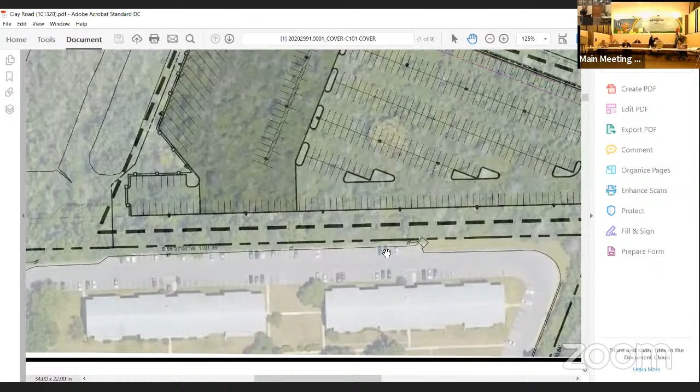If I flip back to the landscape plan here, we are adding in not only a berm, about 3 feet tall, but a plethora of deciduous and evergreen trees as well.

Has that already been approved by CNP? Yes, we had an in-house landscape architect design that and sign off on it, and I believe we had a few comments from Stantec, the town's landscape engineer, which we've addressed and replied to. Are those planned to be planted this year? If all goes right, yes.

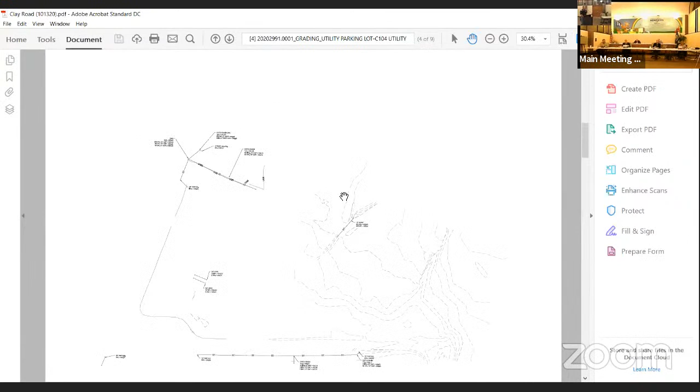The only other question, I don't know if this was already answered - this is still an active construction site. This is the T-Mobile site that started under construction, still active, being split up into different projects. We have, in a sense, two projects going on this one site, the other lot, plus remaining land - what's planned for that parcel?

At this time, there is nothing planned for that parcel. It's been cleared, rough-graded, and seeded. It's been restored. That was a point of contention, it has to be back to stabilization before we can keep moving forward. And the rest of that whole southern parcel of lot 2 is all parking lot, correct? Yeah, correct, this will all be parking lot as recently approved by the town administratively, like Mr. Martin said.

These remaining lands will remain topsoil and seeded at this point for future development. This stormwater management facility has been constructed and is either in process or has been stabilized with seeding. Yeah, it's been pretty stabilized. It needs a little touch up, I think, but otherwise it's been active for pretty close to a year.

The T-Mobile site grading had a swale on the south side of lot 2 from the east to the western pond. Is that in conflict with this new berm? No, we've actually designed a swale there to not only complement, but kind of carry that thought process from the former design plans forward to this.

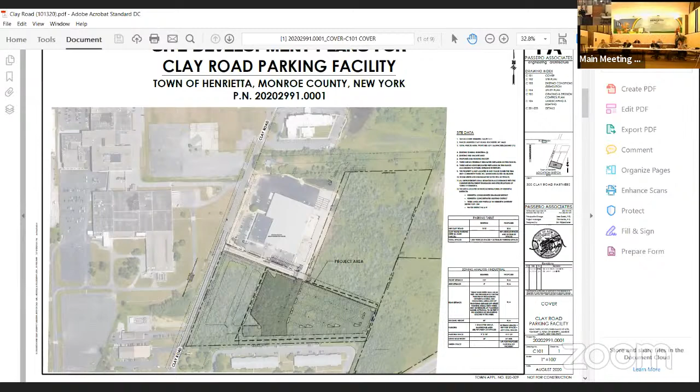Okay, you're working the SWPPP with Joe, right? Yes, correct. Is the swale on the north side of the new berm? If I recall correctly, we can just flip to the drawings. The beauty of doing this virtually, it's on the north side of the berm. So it captures - you can see the parking lot's graded from northeast to southwest.

There's a green infrastructure practice here, and then the remaining parking lot is captured through the swale and then into the stormwater management facility that was previously constructed. Okay, so that's what I was just checking on too.

This lot, the T-Mobile site, I don't have those drawings in front of me, but this was meant to be a parking lot still with a T-Mobile site. I don't know where the building was supposed to go. A portion of it, yes, was supposed to be the road. There was a swale there and then they had the access road coming up through there.

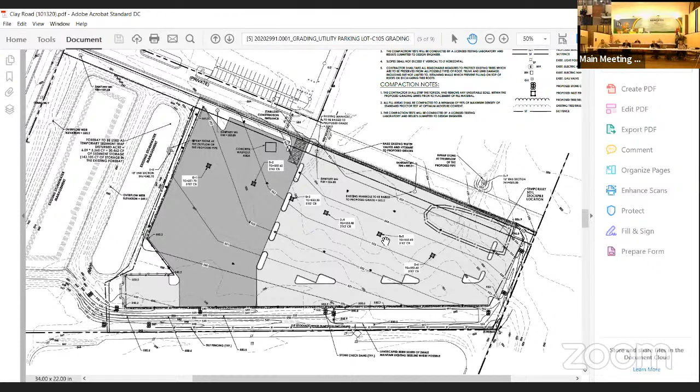Was that building to the east side of this lot? Yes, it was on the second parcel, shown as parcel 2 on your map. So that was supposed to be the building, and this was supposed to be the parking lot for the T-Mobile.

I don't think so, Craig. I think it split the line there. There may have been part of it on there, but most of it was going to be a separate lot that was going to be developed at a later date. Okay.

Well, that was kind of my question - I wasn't sure how far we were really augmenting plans that were originally approved and were already half constructed. No, that shouldn't be an issue.

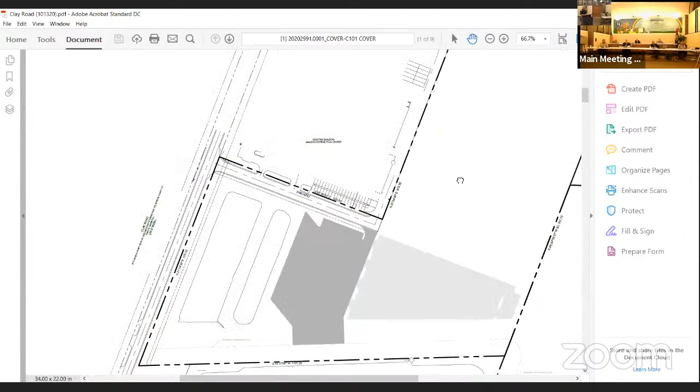No, actually, you hit the nail right on the head, and I don't mean to cut Marty off. So Marty, if you want to answer, just tell me to be quiet. But Mr. Neal, I'm going to zoom back here. I don't have the subdivision map in front of me, I apologize, but this will suffice. This is part of Lot 1.

And then these 330 Clay Road and this parking lot actually do not connect. This Lot 1 is kind of a weird looking flag lot. So the stormwater management area, this private drive, and this back area all consist of Lot 1. This 30-foot strip, which you can kind of see here if you can see my mouse, gets conveyed to 330 Clay Road, like Marty said.

And then this about 6 acres of parking lot will be a standalone lot, which yes, it is landlocked. However, as part of the subdivision map, which is shown on your drawings I believe, we'll have an access easement from Clay Road all the way back that will be conveyed at the time of subdivision.

Okay, so they really are together. Correct, yes. Okay, but just separate. Okay.

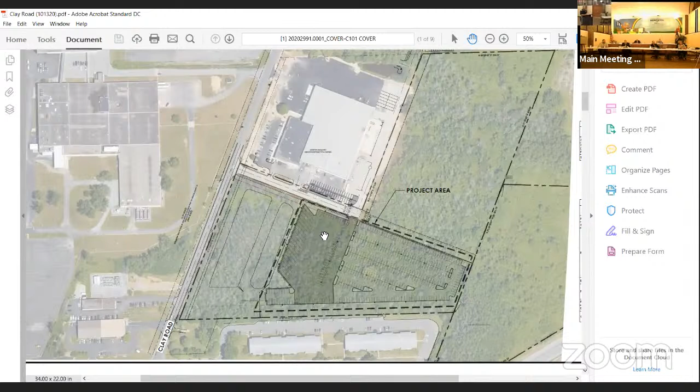And could you explain again what the 30-foot wide Lot 3 is? Yeah, so this strip, if you can follow the hand all the way down, that will be conveyed from this point here, and this is the 30-foot width. That'll be conveyed to 330 Clay Road, which is the existing building. The purpose is to give a little bit more space behind the 330 building for the vehicles.

Okay, so it's just to give them some additional maneuvering room, is that what it is? Just extra room for them?

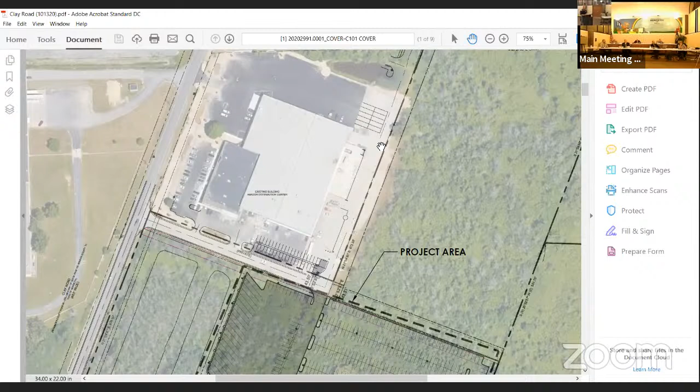Yep, exactly. As far as the buffer is concerned, Chris, I assume we did send letters out to the manager of the apartments? I'm not aware that we did that, no. But I understand we didn't get anybody here for the public hearing, which I assume would have been residents. Yes, we did send letters out for the public hearing, but we did not get any comments back from any of the surrounding residents.

We're not sure if we sent one to the manager, who would probably be the one who would really respond. We sent it to whoever was the owner of the parcel, correct? Okay, do you think we've done our diligence there and we're safe to proceed? I believe we have.

Okay, I guess I'm all set, Mr. Chairman. Mr. Neal, let me just ask your opinion on granting the relief for the buffer. Are you comfortable with that? From the 100 to the 50? Come back to me. Okay.

The chair will recognize Mr. Page. Thank you. My comrades have covered pretty much all of it. I did have a question on the transitional buffer. I should know the answer, I have been 8 years on the town board, but I'm going to ask anyway. Can the planning board grant that relief, or is that a zoning board of appeals issue?

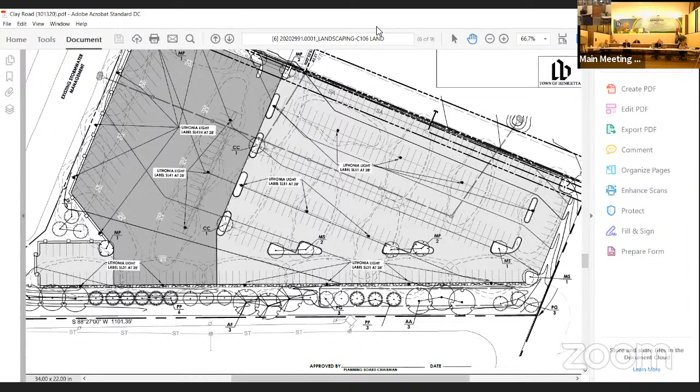So we're not done yet, is what you're saying. I don't know. Thank you, Mr. Eckert. Can I ask a question regarding T-Mobile? Is that off the table? I guess the best answer for that, Mrs. Barrow, is it's hard to say. They were looking at putting it downtown. However, I don't know if that's off the table or not, but certainly a decision has not been made. Okay, thank you. So we're still hopeful there's a good chance it will go there. Thank you.

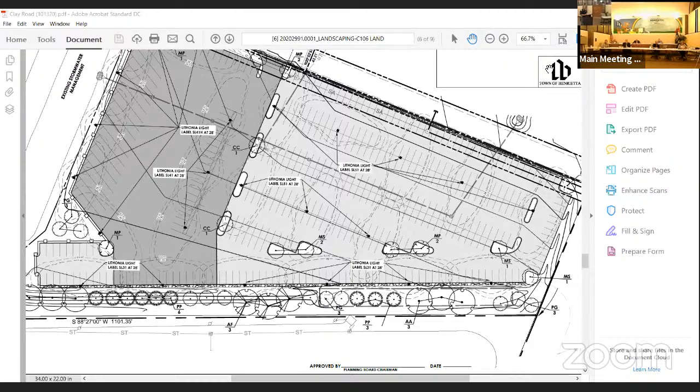SEQR review indicates the action under consideration is an unlisted action as per section 617.7 C1 VIII. The Henrietta Planning Board, as lead agency, has determined that the proposed action will not have a significant effect on the environment and that a draft environmental impact statement will not be required. The action is a site plan application by Clay Road Properties LLC, an unlisted action that will not require a conditioned negative declaration. The purpose is preliminary subdivision approval of a 3-lot subdivision of 19.55 acres located northeast of the corner of Clay Road and Strassenberg Drive in an industrial zoned district.

All relevant areas of environmental concern were identified. Evaluation and examination were carefully made regarding existing conditions versus the proposed site improvements. It has been determined there will be no adverse environmental effect as a result of the proposed action. I, James Gruner, therefore make the motion that we make a negative declaration and that the chairman be authorized to sign the statement of environmental significance.

Do I have a sufficient second? Second. Thank you, Mr. Eckert. All in favor, say aye. Aye. All opposed, say nay. In the opinion of the chair, the ayes have it. The motion carries.

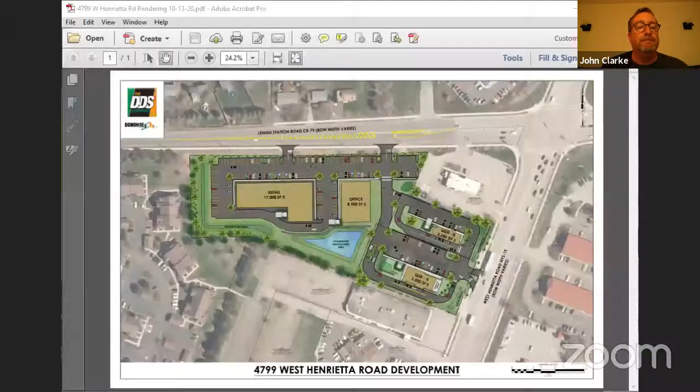The proposed subdivision would take the 5.2 acres into 3 separate lots. Lot 1 would be 1.08 acres with frontage on West Henrietta Road, on the southern portion of the property. Lot 2 is 0.63 acres, also with frontage on West Henrietta, on the northern side of that frontage. Lot 3 is 3.5 acres, to the west, with frontage on Lehigh Station Road.

The project would construct 4 new buildings totaling approximately 31,600 square feet. Lot 1, the 1.0 acre parcel with frontage on West Henrietta, we're proposing a 3,500 square foot Burger King. Lot 2, the 0.63 acre parcel with frontage on West Henrietta, a new 2,200 square foot quick service restaurant is proposed; we do not have a tenant at this point. Lot 3, the 3.5 acre parcel with frontage on Lehigh, we're proposing a 17,000 square foot retail building and an 8,900 square foot office building. There are no tenants for those buildings either.

Access to all 3 lots is proposed from both West Henrietta Road and Lehigh Station Road. We're able to meet all the parking requirements, and we're working on a revised landscape plan at the moment, and lighting will also accompany the plans.

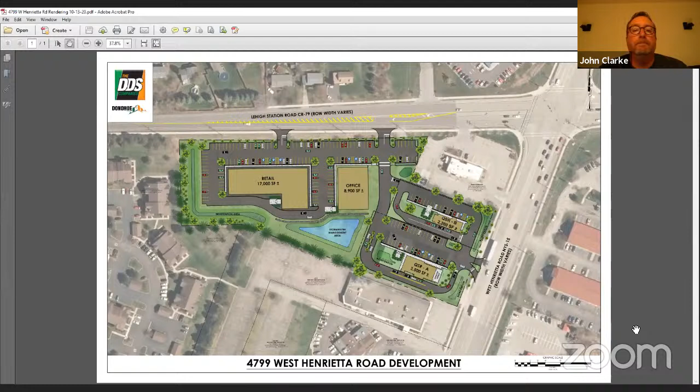Thank you very much, we appreciate your stopping in tonight. We appreciate all the good questions, and we're looking forward to moving this along and seeing you next month. Sounds good, thank you.

The last item on the agenda is a discussion item for the planning board to review building elevations for the remodel of Bob Johnson Mazda at 3755 West Henrietta Road. Can I get a motion to table the site plan application? The subdivision was concept, but the site plan itself was for final site plan approval. I'd crossed that off earlier. Do I have a sufficient second? Second.

All in favor, say aye. Aye. All opposed, say nay. In the opinion of the chair, the ayes have it, the motion carries.

Thank you. Okay, all set? Yes, thank you. Good evening all, I'm going to start by going off script for one moment.